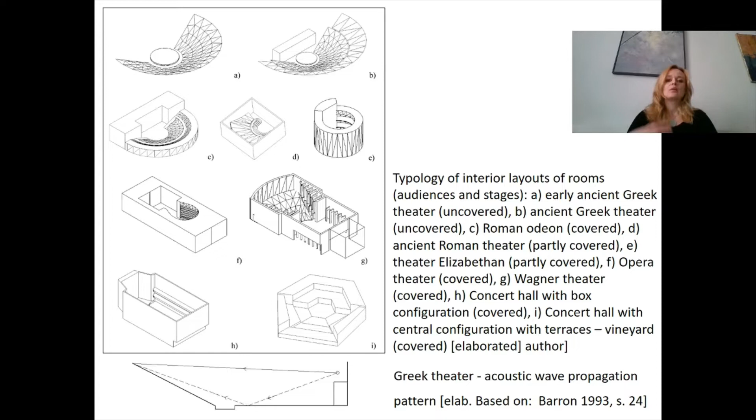This configuration with different shapes that you can see here, starting from A, finishing at I, nowadays can be combined into the hybrid design, the one that you could see in the Palace of Culture - a mixture of configurations to give the perfect sound and amazing architecture.

I will start now from the transformation of the shoebox shape arrangements, the first concert halls. We can say that the shoebox shape configuration was the first real concert hall meant for music, not just for theatrical or drama opera performance.

Architectural acoustics is a quite new domain according to the disciplines of science, and acoustic architecture is considered to be focused on the best performance of sound, depending, of course, on the function of the room. We have to remember that what is good in a school is not good in a concert hall, and what is good in a concert hall will not be good at the offices.

The first rules, terms and definitions that were formulated according to acoustics were the definitions from the second half of the 19th century.

In the 20th century, acoustics really grew up, basing on physics. Of course, the idea of acoustics of sound and propagation of sound started in ancient Greece. However, the actual scientific basis of acoustics is quite new.

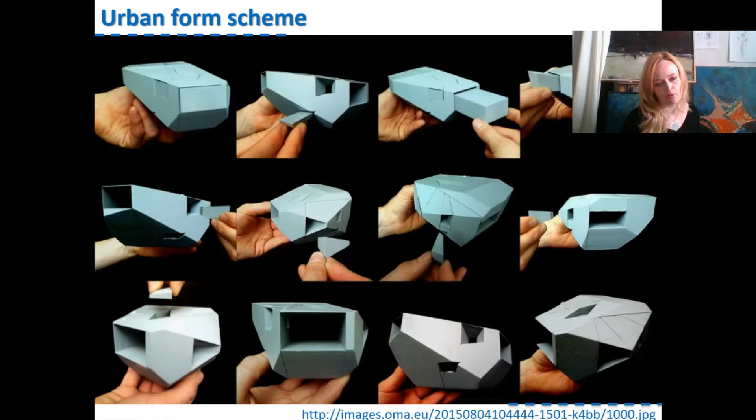Here you can see the ideas about the openings part of the building in order to open the views for selected views of the city.

And you can see here the night view. This is the square in front of the concert hall, and it's very willingly used by young people as some sort of road for bikes and roller skates.

This is the main hall, and the view in the main hall is very huge, and it makes a huge impression. The main room is 1,300 seats, so as you can see, the capacity is lower than 2,000 viewers.

It has a lot of additional rehearsal rooms, recording studios, educational spaces, and of course, as every multifunctional building, it has a cafe, and it's a function that goes very well with the concerts and this kind of meetings.

The shell structure of the building is actually the construction site of the building, which is very untypical, very unusual solution, and it's very innovative and novel.

And the shell is not that thick, it's only 30 to 40 centimeters thick, so it's not that a lot. However, the walls of the concert hall are over 1 meter thick. Of course, it's for the construction of the ceiling of the concert hall, but also it isolates very well the concert hall from any vibrations, any sounds that could go inside.

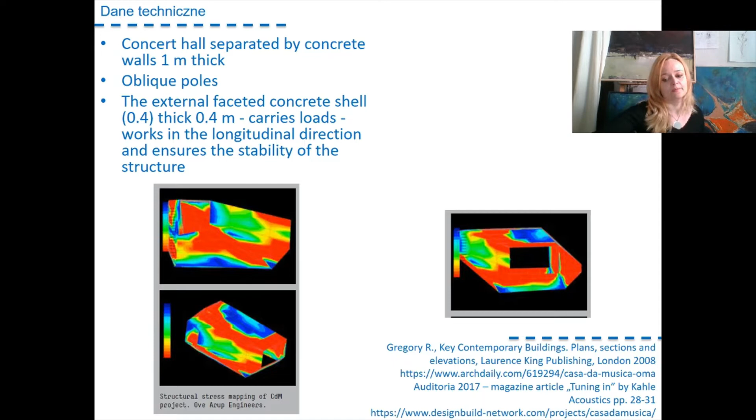I will not go so deeply into the details because we are more focused on the hall itself. However, it has a lot of important things.

And this is the terrace. It's supposed to be a musician's restaurant. Now it's a restaurant for everybody. It's accessible from the ground floor, and there's a small terrace. As you can see, it goes in line with the square, so it's very public, very accessible, very comfortable.

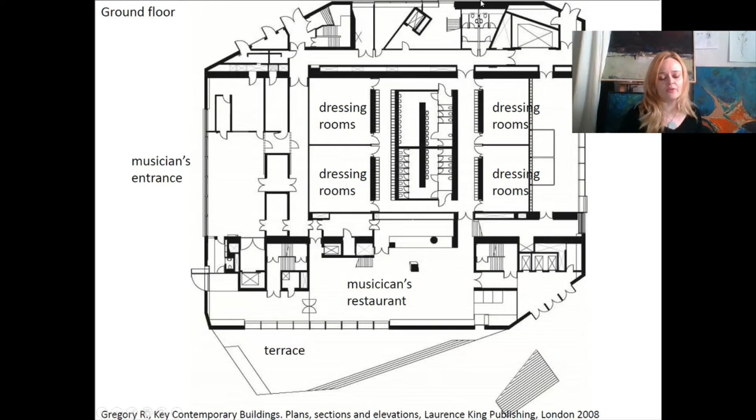Here you can see the parts for the musicians with the dressing rooms, some sort of rehearsal rooms. There's of course an office space and a space for deliveries. You can see the large elevators which allow delivery of large things like pianos in the vertical position, which is always very important for the concert hall.

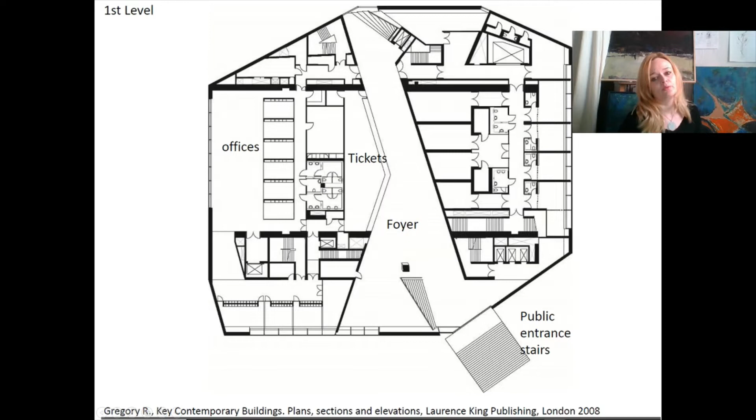On the first level, we have very representational stairs and a huge ticket room with a shop with a foyer. There are also parts that are not accessible for everybody. They are accessible for the musicians, for the workers, for the staff of the concert hall.

Here you can see the main auditorium. You can see the acoustical sluices. The audience goes through the acoustical sluices.

The vestibules, so there is no direct connection, because it's not only the isolation of the wall, but also it's very important to isolate by the double doors. One thing is that the sound will not go through the double doors. The other thing is that if somebody wants to leave the concert hall during the concert, they go outside, close the first door, and then they open the other, so there is no light going inside the room during the concert, which is very important. Otherwise, it would be highly uncomfortable to see the concert if somebody had to go outside of the room.

Here you can see the bar and you can see the glass. Both this wall behind the stage and the wall behind the crown of the auditorium are glazed. Of course, you see the sky through these walls because they are quite high above the ground, but if you go directly to the window, you can see the parts of the city that had to be shown, could be shown from the concert hall.

The glass is very reflective if it's a good acoustical material. However, I wouldn't advise you to put it on the back of the concert hall because we don't want any reflections from the back. As I have learned from my colleagues, there is a special curtain which is put at the back of the auditorium, so there would be no reflections from that wall when the concert hall is in use, and you don't want reflections from the back wall.

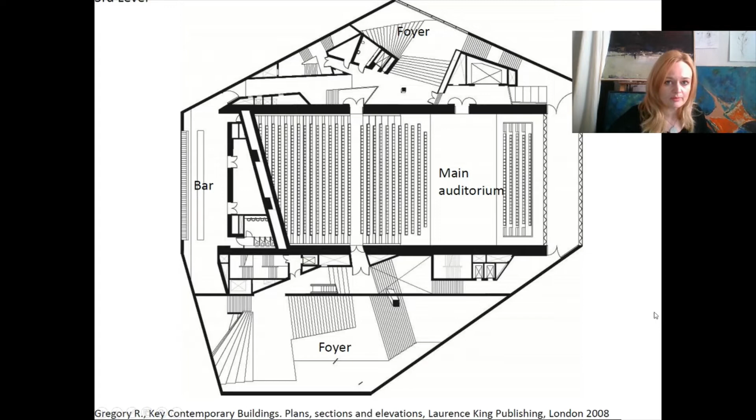As you can see, there's a lot of stairs, but I have asked about it, and people with disabilities can go to every level with these additional elevators that you can see here. So there's a lot of elevators and there is no problem that people with disabilities would not be able to go inside of any area.

There are additional rooms, and as I've already mentioned, they serve educational purposes, so there are some additional things you can learn while being in this room.

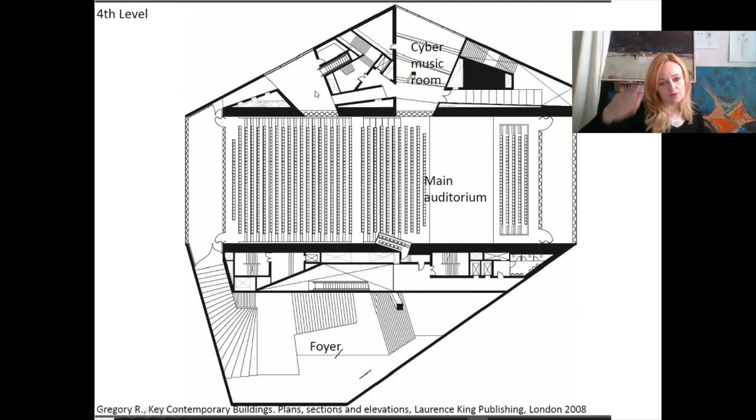Here you can see the walls are also made from glass. So from these rooms you can look inside of the concert hall. However, you don't hear the concert here.

So this is the main shop and the main ticket office, the one that I have shown on the layout, and you can see here the stairs that are going all the way through the auditorium, through the public spaces towards the different levels of the auditorium.

Here you can see the room, and again the walls are not parallel. You can see a lot of these additional elements that are making the walls unparallel. Here you can see the acoustical line strip diffusers, and you can see the canopy over the stage, which is made of acrylic glass, and it reflects sound from the stage towards the auditorium, which is highly important when the room is as high as this one.

And you can see the natural light coming inside of the room. This is the bar part, and this is how these glazed elements look. And they are reminding us again of the graph of the acoustical wave.

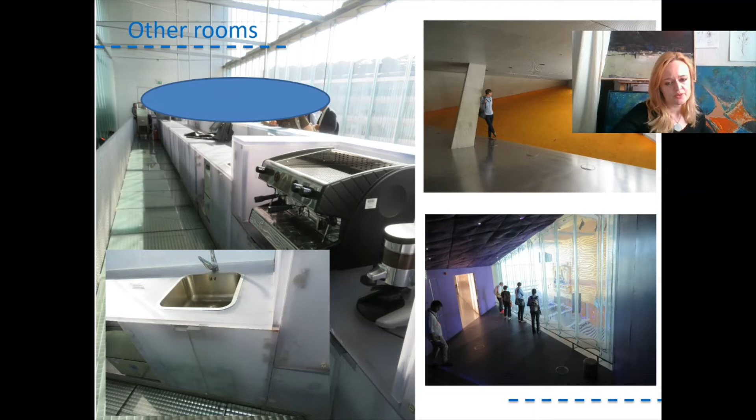And now about the vineyard configuration. A vineyard configuration was invented in the second half of the 20th century, and it was basically the idea of putting some of the audience on a terrace, but not a balcony. So the terrace has a wall underneath, and this wall reflects sound. So it doesn't go under the balcony, it reflects sound back to the audience which is under the terrace.

But this side reflection was very beneficial, and also the room was asymmetrical, which is also very beneficial to our ears, because our ears don't like sound which is symmetrical. When we are inside of the room, one ear and the other ear are working in order to calculate the differences between when the side reflection comes back to them relative to the direct sound. And this is how we orient ourselves in space.

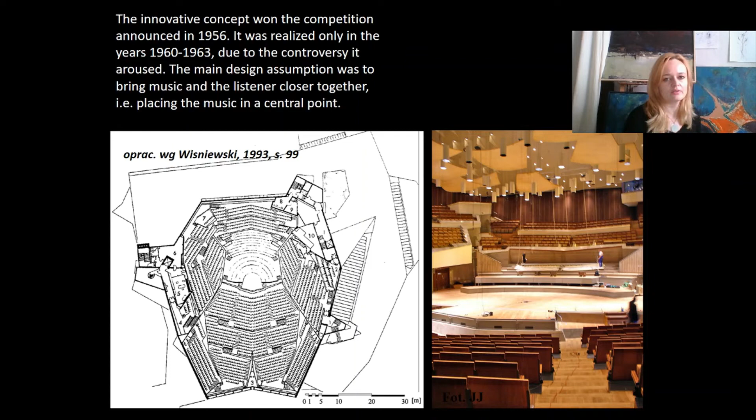And in that way, the concert hall became one of the best acoustics in the world, and it's very famous still nowadays. And still, the architects and acousticians from all over the world are coming to see this concert hall and to understand and to learn from it.

As you can see, there are pyramidal diffusers here and here. There are side terraces, the walls very close to the listeners. Any place you take, you can see that there is additional space for additional side reflections. So we have direct sound and we have side sound, side reflection to every user of that room, which is very novel, which is very interesting, and is now used also in the hybrid designs.

This is how the outside looks like. Of course, it's an architecture that aged, but the configuration of the room is still very, very interesting. And I will show you the room which follows basically the rule that you see here. Here you can see the graph designed, drawn by Lothar Cremer. The graph comes from a book by Barron, of course, but the design is by Lothar Cremer, and you can see that it's a study showing that every listener has some side reflection going to them.

So the sound in the vineyard configuration is very blended. It goes from all sides. This is the graph that I've prepared from one of the halls of that configuration. You can see that it's very, very blended. It's not so organized as in shoebox shape configuration, which is quite interesting.

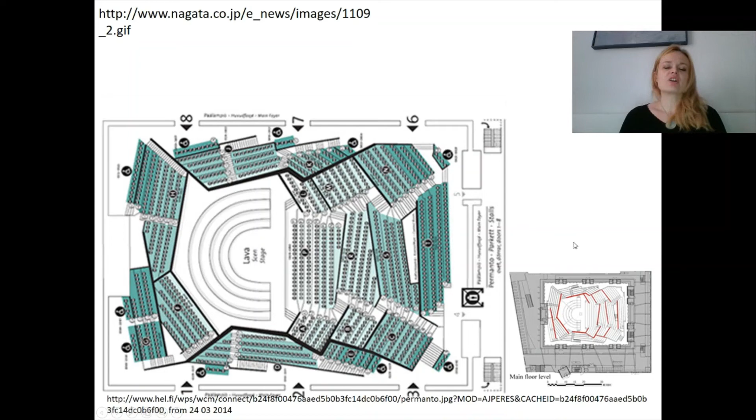Of course, the stage layout is very classical and it allows you to seat a full symphony orchestra, which is 120 musicians. And what is also very interesting, there's an induction loop which allows people with hearing disabilities to hear the concert better. And it is adjusted for people with disabilities in wheelchairs. It has 28 wheelchair seats.

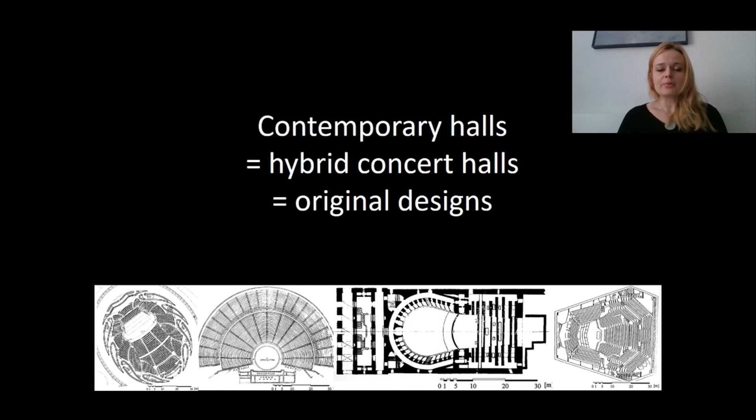In the contemporary world, we either have concert halls which are totally designed individually, they don't follow any pattern, we could say, or we have the hybrid design, which connects different configurations with terraces. I could sum it up. Of course, it's a work in progress, so it's very hard to define a typology at once.

Here you can see the Boettcher Concert Hall, which is designed by Hardy Holzman Pfeiffer Associates, and the acoustics was designed by Chris Jaffe, acoustician, who is unfortunately no longer living. His idea was not to design a configuration that is shoebox or vineyard. He was designing halls that he was calling horizontal or vertical. This concert hall is vertical, and it has a very untypical design with a stage in the so-called center with an asymmetrical layout of terraces, because these are not balconies, of course. And you can see them here.

You would say that this is a very unfriendly design for acoustics because it's focusing, but when you look at the front of the terraces, you can see the pyramids which are going back and forth, and they are diffusing this acoustical wave. They are diffusing it very softly, very evenly around the room, so the sound is not really focused.

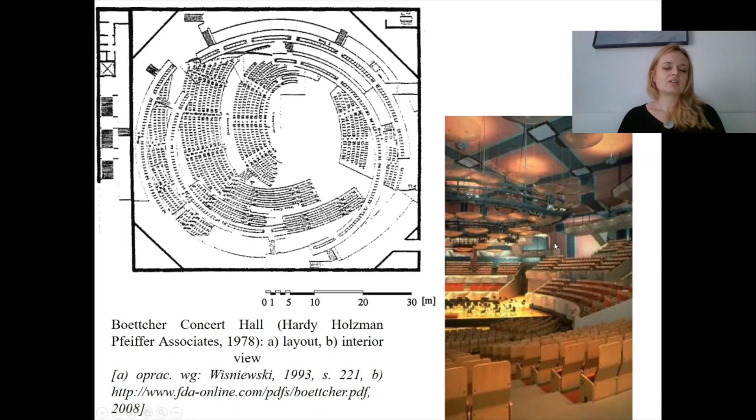Also, you can see here these acrylic glass plates, let's call them canopies, that are suspended, and they are reflecting and diffusing sound back to the auditorium. So this design is very untypical. It also gives a very interesting architecture.

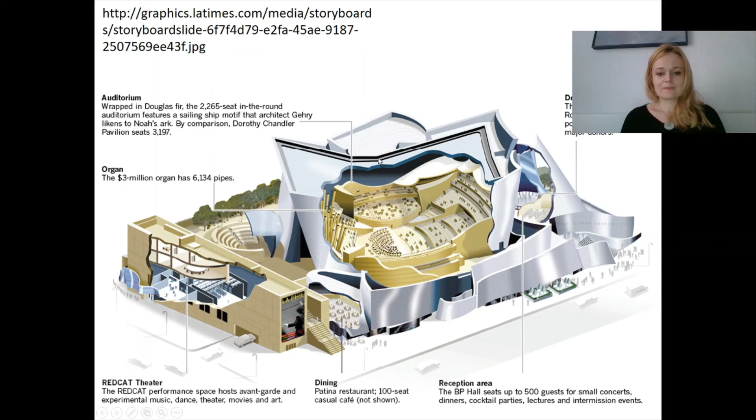If I could say that there is a typical hybrid design, then probably it would be Walt Disney Concert Hall, designed by Frank Gehry. The interior of the room is some sort of cross section between the vineyard with organic terraces and a shoebox-shaped configuration. The auditorium in front of the stage, compared to behind the stage, is much larger. However, the stage is not in the back of the auditorium, so it's surrounded by the auditorium. You can see the two levels of terraces.

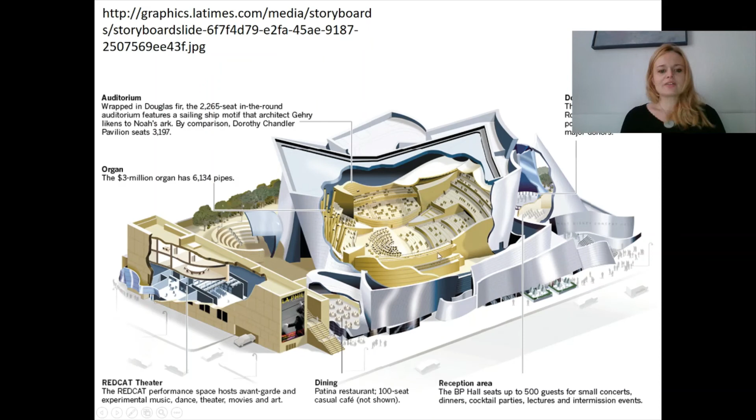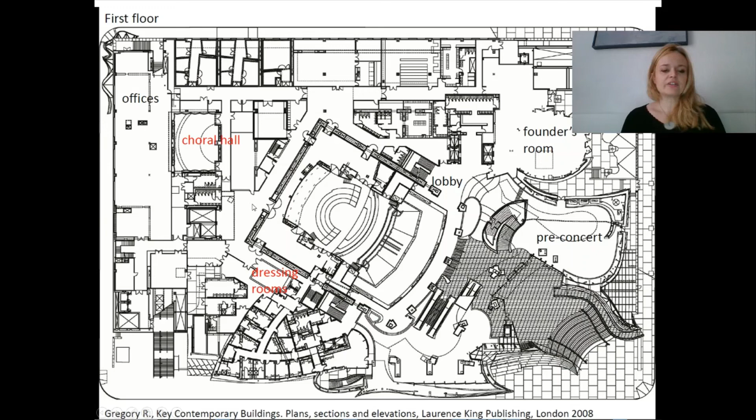You can see that the front auditorium is also placed on the terraces. You can also see additional spaces here in this cross section. This is how the first floor looks, with again the representational entrance with the stairs. There is a foyer, there's a lobby, there are places for musicians and artists. There's a choral hall, and this is how the concert hall looks from the top.

So you can see the part behind the stage and in front of the stage. You can see the side terraces. You can also see some additional smaller recital theaters, which you can find here for chamber music, for chamber performances. Here you can see the section and the layout of the concert hall.

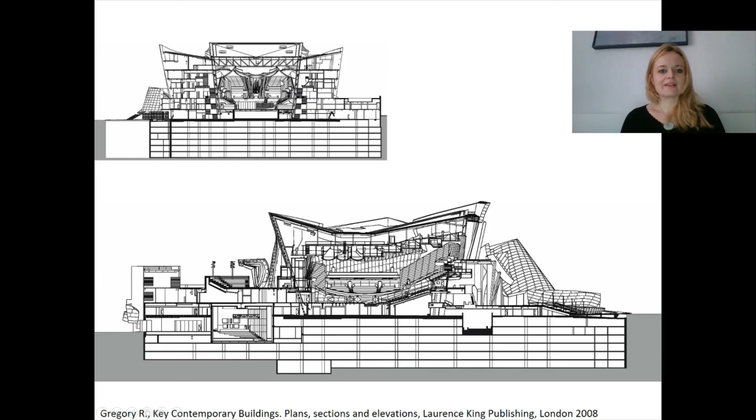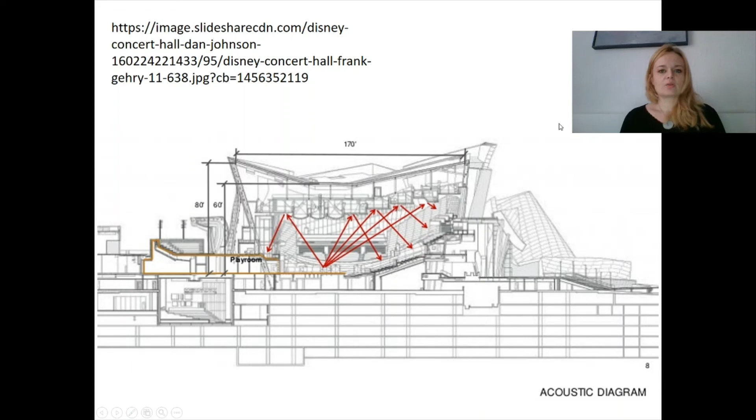You can see the canopy over the stage, which again reflects the sound back to the audience, which is also very well seen on this graph that was prepared, that I found on the website for that room, so you can see how it works in practice. It's a very good graph. I mean, the scheme of the wave propagation is very well designed.

So you can see the side part of the terraces, and again, every person in the audience will probably have some lateral side wall around the ears so they can hear what is going on the stage. And just to remind you, some simple rules. If we have such large rooms, you have to remember that you have to have at least two exits. In this kind of concert hall, there are 6 or 8 of them, or sometimes even more, and they have to be a distance from each other of at least 5 meters.

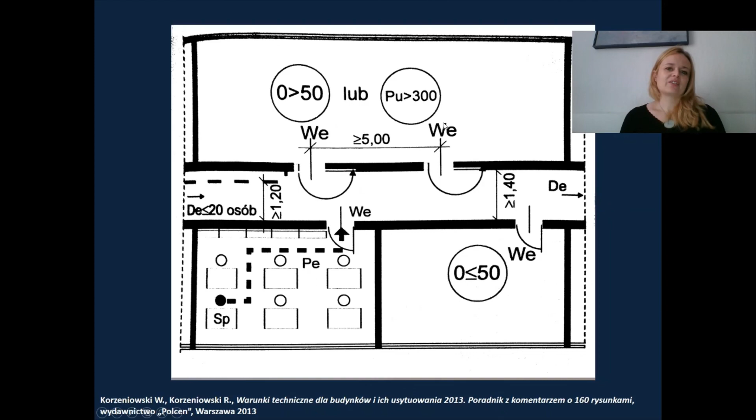What is also very important in large rooms is that the way of entering the room cannot cross with the evacuation way. So the evacuation has to be preferably directly to the outside, but of course it cannot cross the way of getting in, because there could be people waiting here and people wanting to evacuate from here, and it would be a huge problem.